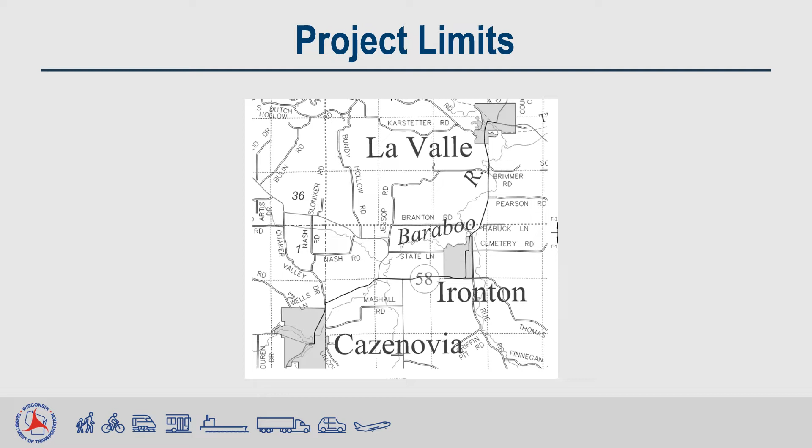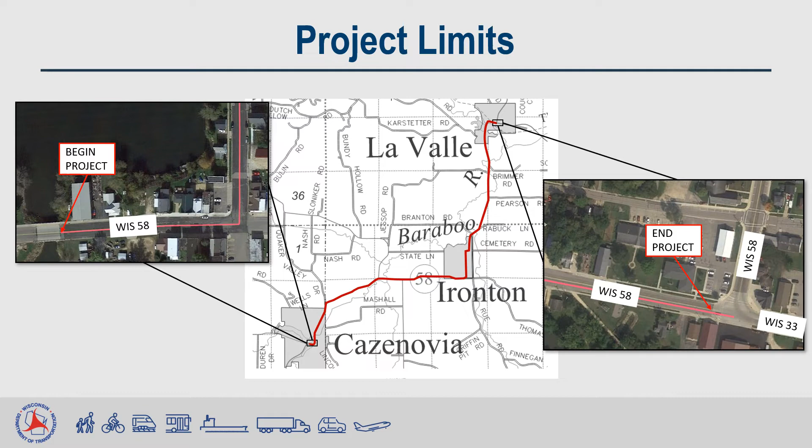The proposed project along Wisconsin Highway 58 begins at Lee Lake Bridge in Cazenovia and continues for 6.738 miles and ends at Wisconsin Highway 33 in La Valle. It's located in Richland and Sauk counties.

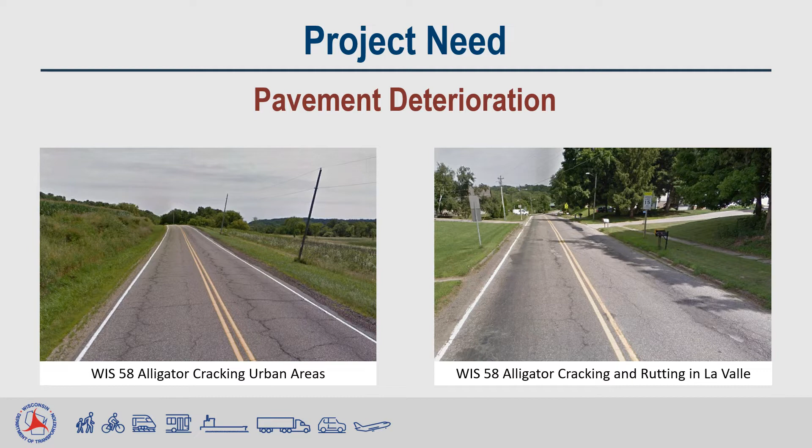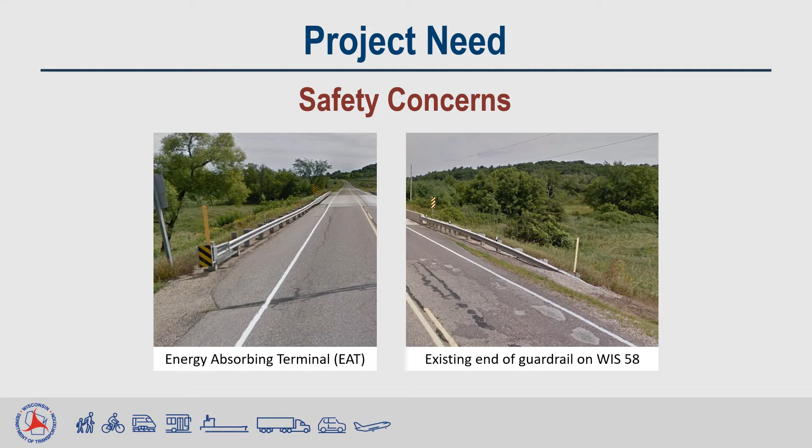Another need for this project is to increase the radius of the West Main Street intersection in La Valle to provide a safer turning movement for large trucks. The existing turning radius is too small and results in trucks using the oncoming southbound lane for turning.

Another need for this project is that the existing super elevation on the curve along La Valle Mill Pond is highly variable, thus complicating paving operations during construction. To improve constructability, the centerline profile will be lowered over a 375-foot stretch in the middle of the curve. Also, the southbound shoulder will be raised to a consistent elevation throughout the curve. This helps the contractor install the guardrail at a consistent height along the corridor.

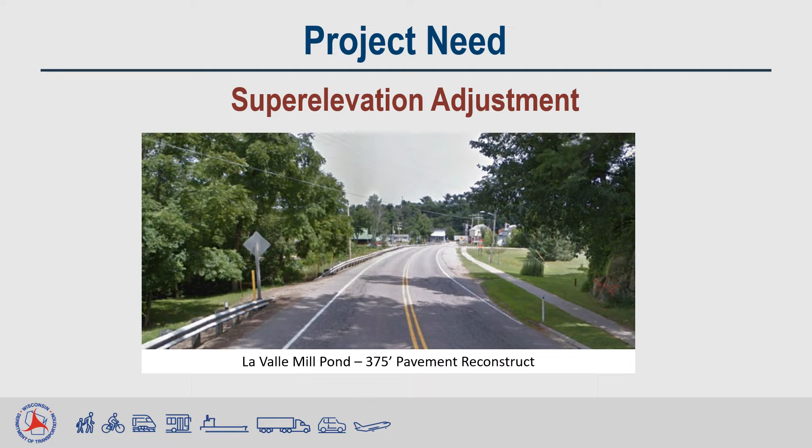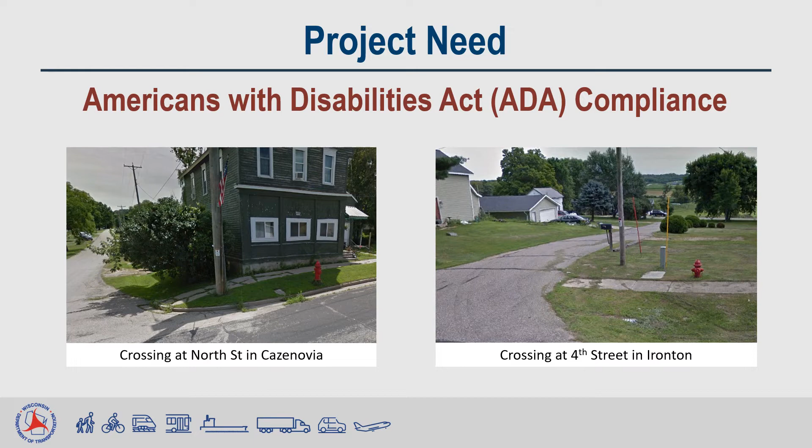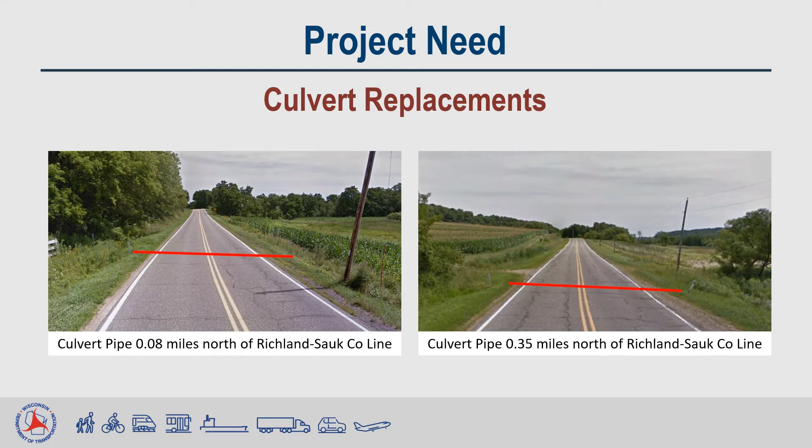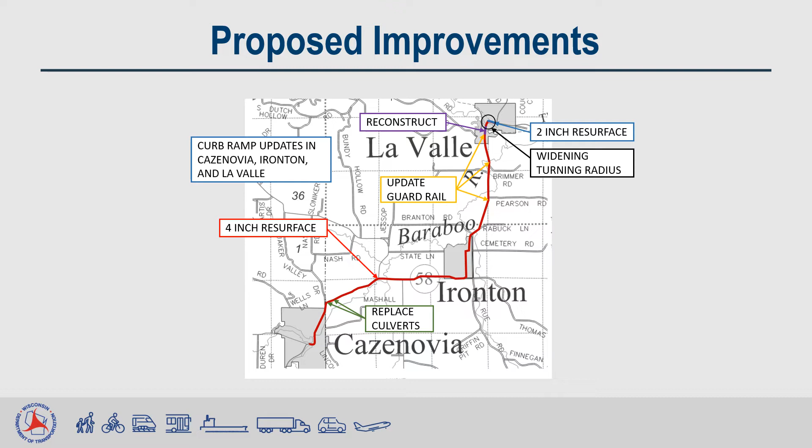The next collection of slides will explain each proposed improvement, first showing the typical sections of Wisconsin Highway 58 and the reconstruction. Second, explaining the widened turning radius in La Valle. Third, explaining the drainage improvements. Fourth, explaining guardrail updates. And finally, explaining the curb ramp improvements.

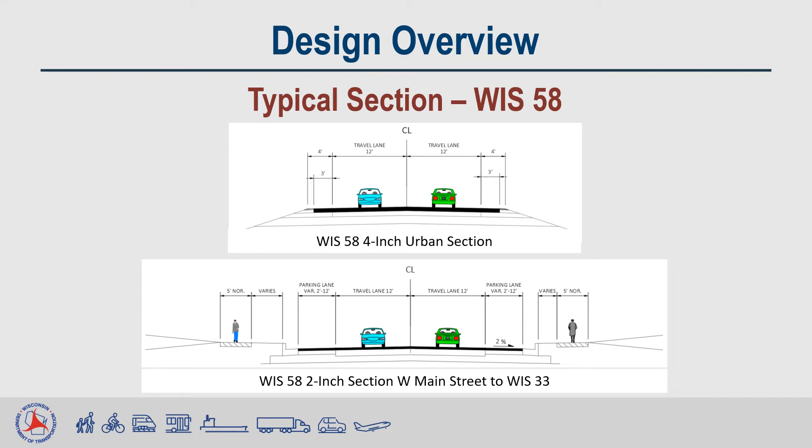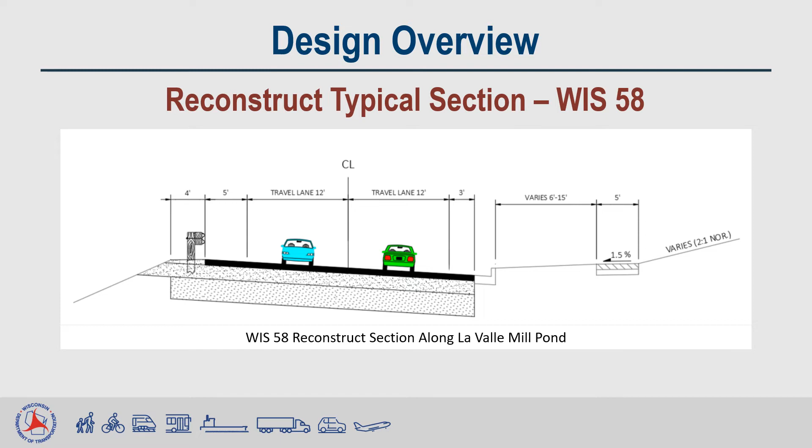Here are two typical sections in the project limits. The first is one of the sections with a 4-inch mill and overlay on one of the urban sections of Wisconsin Highway 58. The second is of the 2-inch mill-in overlay in La Valle. Here is the reconstruct typical section on the curve along La Valle Mill Pond. The proposed work will rebuild the typical section by adding an additional sub-base layer and thickening the base layer.

The proposed improvements will also consist of widening the turning radius at the West Main Street intersection by shifting the curb line 7 feet from the existing curb and gutter. This keeps trucks within the northbound lane while turning right.

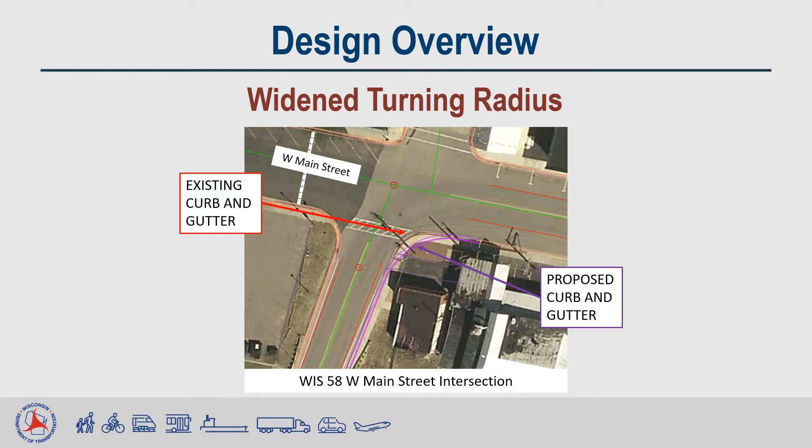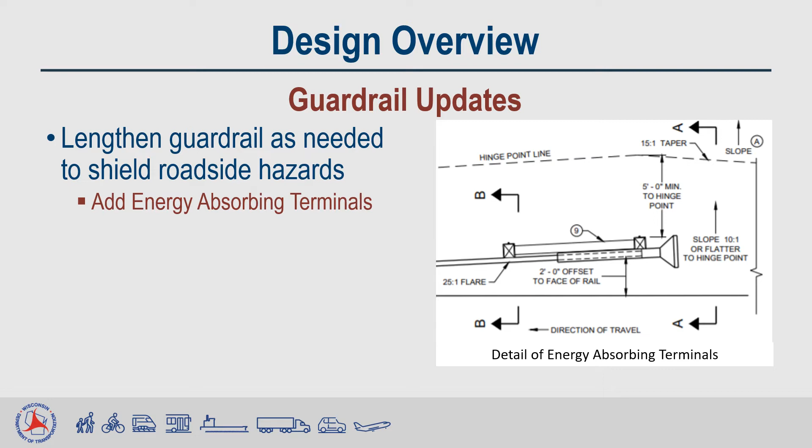Wisconsin Department of Transportation maintenance staff reviewed the status of the culverts along the Wisconsin Highway 58 corridor and identified 2 culverts that needed replacement. The drainage conditions were analyzed to determine the size of the proposed culverts. The proposed culverts will be replaced with the same size culvert currently in place, and concrete apron end walls will be added. Existing guardrail will be replaced, extended as needed, and energy-absorbing terminals will be added. Additional grading will be done around the guardrail to meet Wisconsin Department of Transportation specifications.

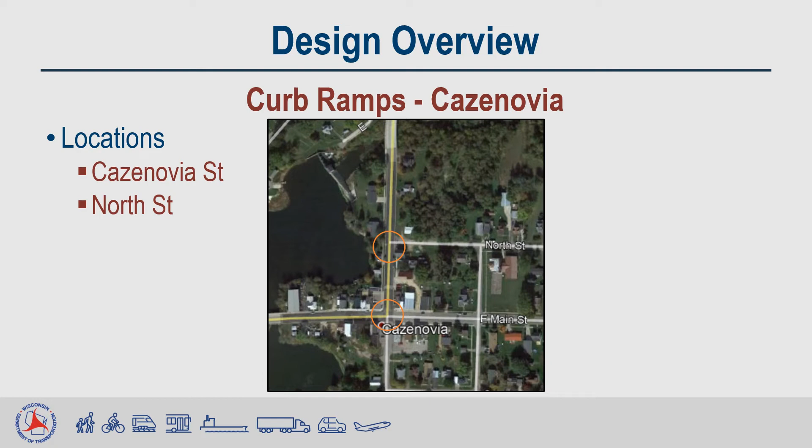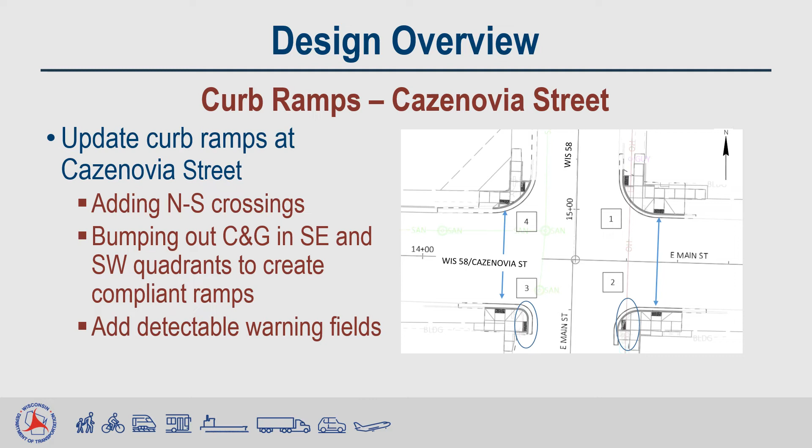Next, I'll discuss the curb ramp improvements along the project in Cazenovia. The locations of the curb ramps proposed to be improved to meet Americans with Disabilities Act standards are Cazenovia Street and North Street. The improvements will consist of reconfiguring the intersection crosswalks and adding curb ramps at North Street. At the Cazenovia Street intersection, the southeast and southwest quadrant curb and gutter will be bumped out for the curb ramps to meet compliance. 2 north-to-south crossings will be added and the east-to-west crossings will be updated.

At North Street, a curb cut will be created to bring the ramp to street level. A receiving ramp in the northeast quadrant will be added, as well as an east-to-west crossing from the curb ramp island.

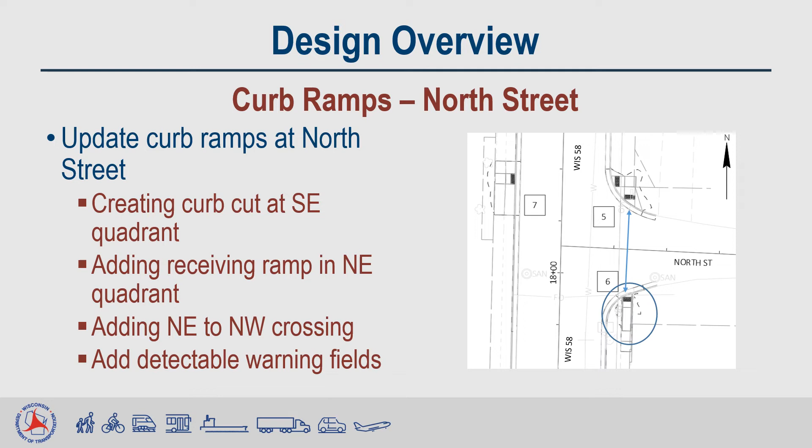Next, I'll discuss the curb ramp improvements in Ironton. The locations of the curb ramps proposed to be improved to meet Americans with Disabilities Act standards are at 5th Street to 1st Street, Main Street, and State Lane. At the 5th Street to 1st Street intersections, the ramps will be updated and detectable warning fields will be added. We are adding a crossing at Main Street and State Lane.

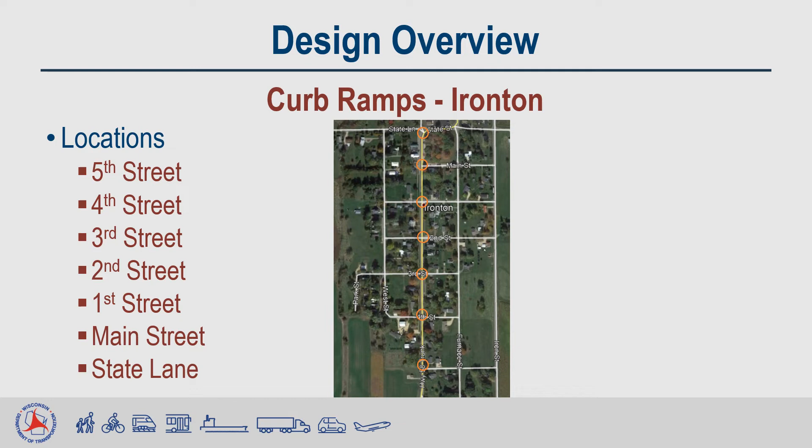At Main Street, we are adding a crossing to provide access to the businesses in the northwest quadrant that are across from the park.

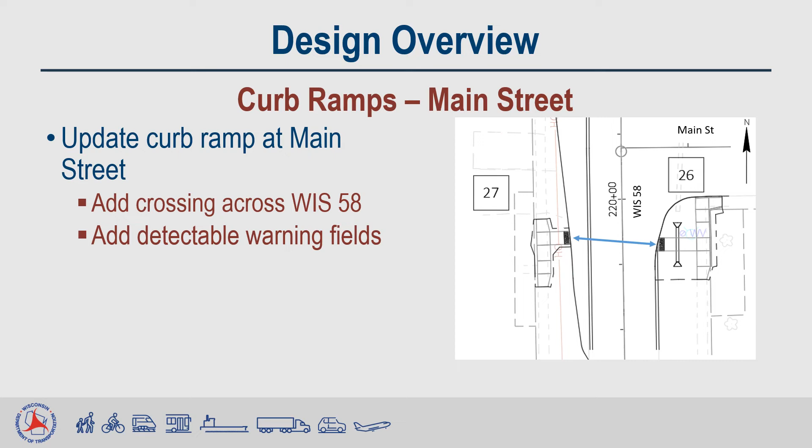At State Lane, the existing sidewalk terminates and does not provide safe access to Cowboy Bar. We are adding 4 ramps to provide access: 1 ramp down to State Lane, 2 ramps between State Lane and Mill Street, and a receiving ramp by the bar.

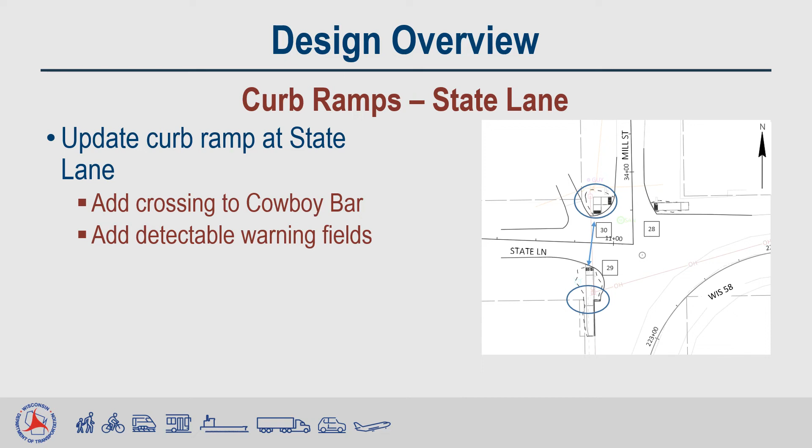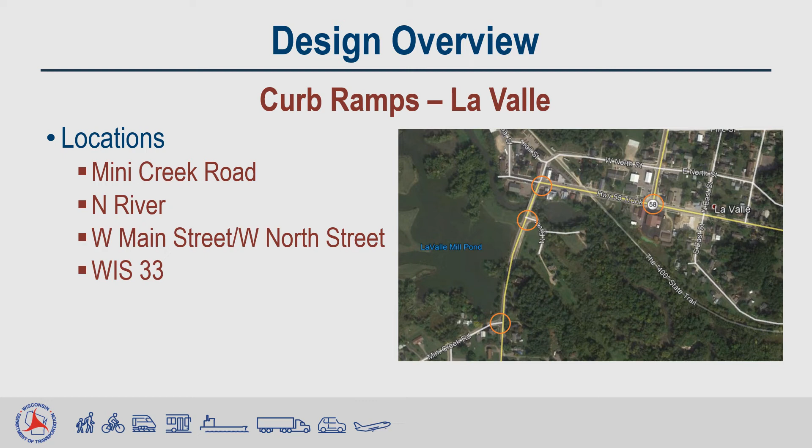Next, I'll discuss the curb ramp improvements in La Valle. The locations proposed to be improved to meet Americans with Disabilities Act standards are at Mini Creek Road, North River, West Main Street / West North Street, and the Wisconsin Highway 33 intersection. At Mini Creek Road, we are removing the steps in the southeast quadrant, as well as the steps, retaining wall, and sidewalk in the southwest quadrant.

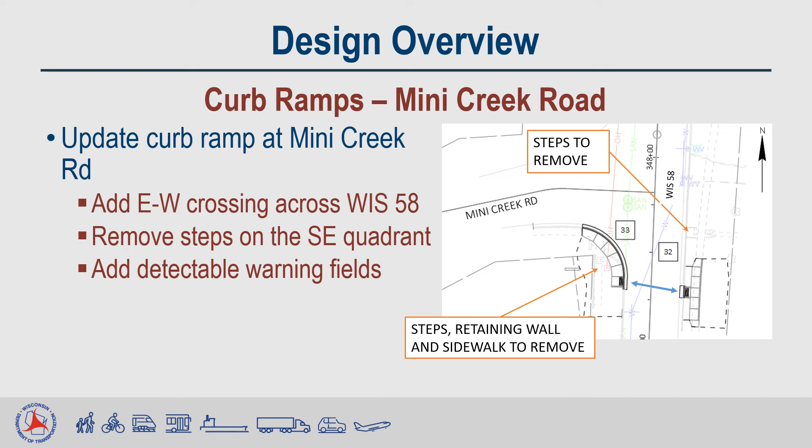We are wrapping the sidewalk in the southwest quadrant farther around the corner, replacing the curb and gutter and tying it into the existing asphalted curb and gutter, and shifting the ramp in the southeast quadrant further south for flatter slopes. At North River, we are replacing the washed-out sidewalk from the 2018 flooding event. Both ramps are being updated with detectable warning fields.

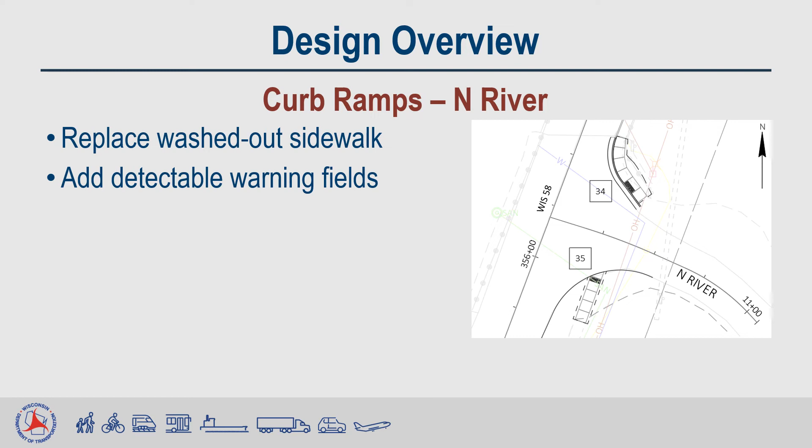At West Main Street, we are adding a north-to-south crossing across West Main Street and one across Wisconsin Highway 58. After widening the turning radius, the ramps for the east-to-west crossing will be updated. Similarly, the ramps for the east-to-west crossing across West North Street will be updated.

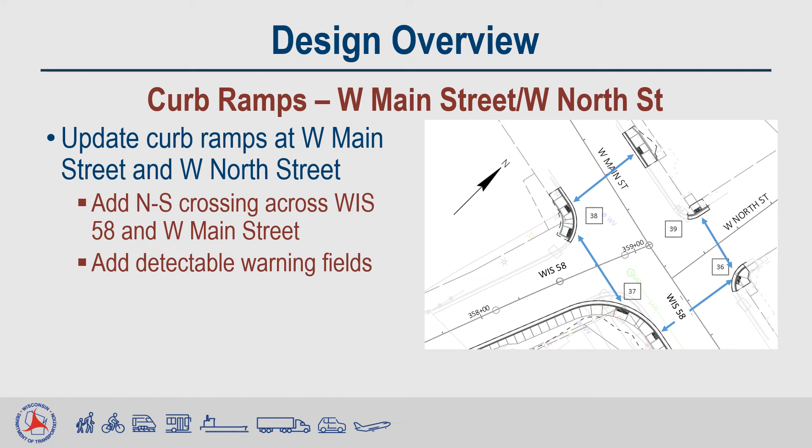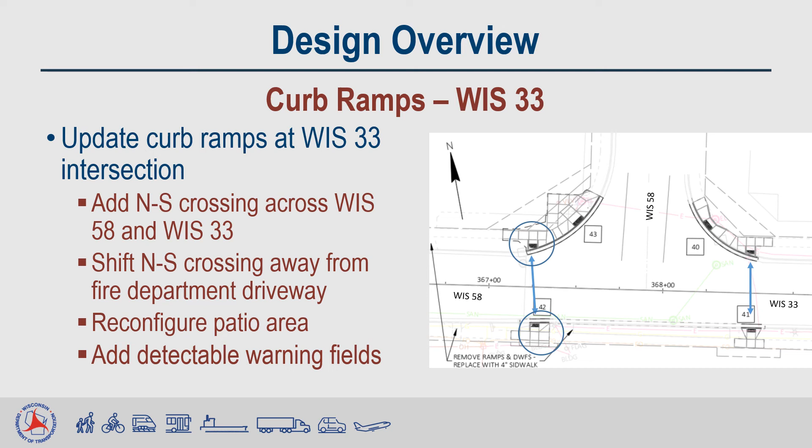Moving on from the design overview, there is a piece of general project information to cover. Hazardous mailboxes are ornamental or heavy mailboxes, and they pose as a roadside hazard. They should be replaced with standard posts. Ornamental mailboxes are not crash tested and may cause serious damage to the passenger and vehicle. Standard posts are crash tested and will break upon impact, so the mailbox will deal less damage to the vehicle and passenger.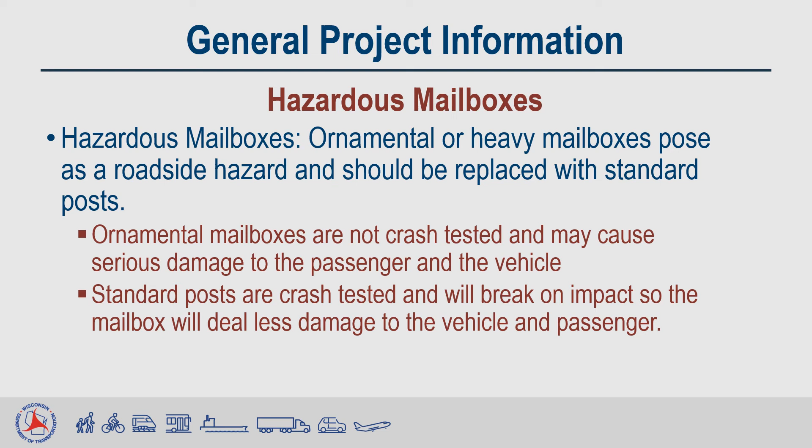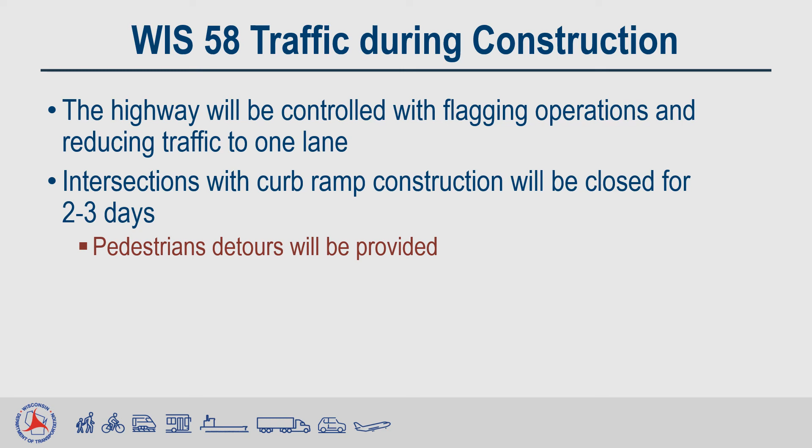During construction, traffic along Wisconsin Highway 58 will be controlled with flagging operations and will be reduced to one lane. Intersections with curb ramp construction will be closed for 2 to 3 days. Pedestrian detours will be provided.

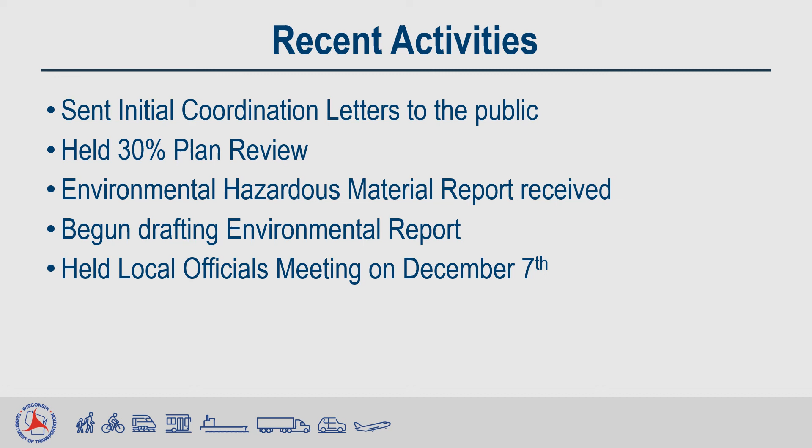Recent activities for the project include sending initial coordination letters in March, holding a 30% plan review mid-November, receiving the Environmental Hazardous Material Report, which identified soil contamination near the Albus Bar and Grill in Cazenovia, as well as the RE/MAX building in LaValle, drafting our environmental report, and recently holding our local officials meeting on Monday, December 7th.

The next steps for the project are to finish drafting the environmental report, and we anticipate the report to be signed by late April or early May. The right-of-way plat is anticipated to be done by August 2021, and the real estate acquisition will start once the right-of-way plat is complete. The locations where right-of-way is needed are at the curb ramp locations mentioned. The plans for the project should be finalized by August 2023, and construction is anticipated to begin the next summer.